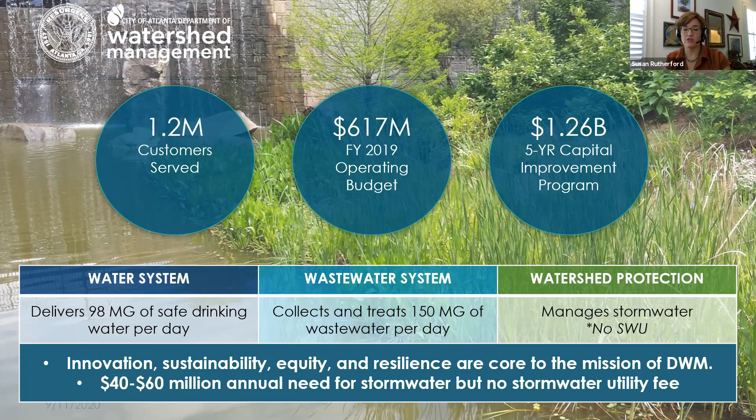Stormwater runoff is everyone's problem. It's a huge resilience issue. It all comes from all of us - we're part of the problem. Our rooftops, our driveways, our walkways and sidewalks, the streets - all of this is draining at some point into a creek or a river. These are the problems of stormwater runoff, and we're talking about both quality, what's in the water, and also quantity, the volume of the water.

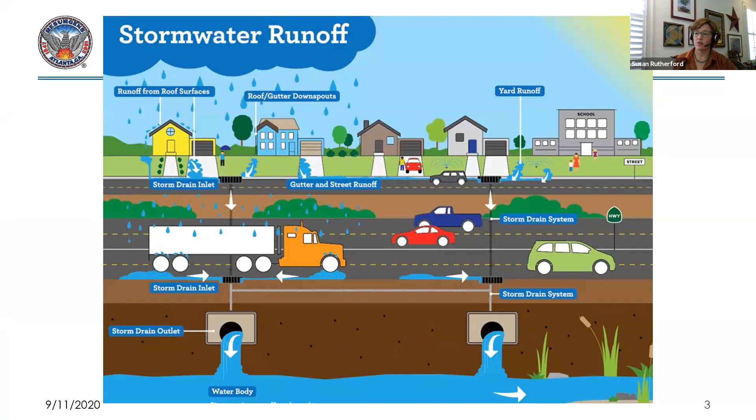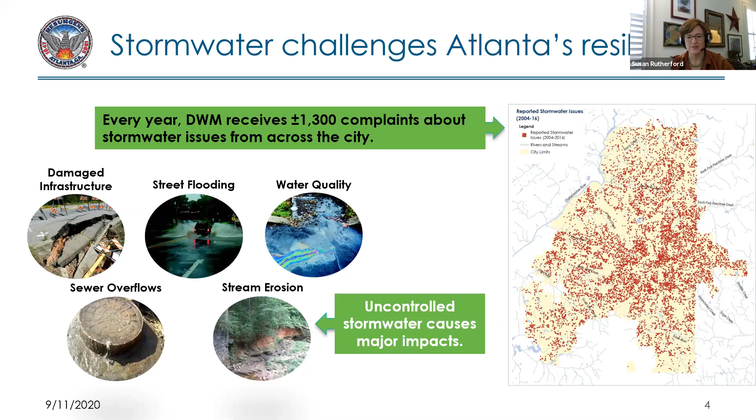I like for people to understand that even though we don't have a stormwater utility fee as a funding source, we have a lot of problems with fixing and maintaining the pipes that we have. But we do a lot with inspections and monitoring. We have stormwater compliance inspectors that go all over the city, inspecting industries to make sure they're not polluting or allowing runoff from their sites into the public storm system. We also have erosion control inspectors who evaluate active construction sites to make sure runoff isn't exiting - that everyone has their silt fence, temporary construction ponds, and all those measures so silt doesn't erode off into our streams.

And then we have floodplain management. We make sure we have very strict ordinances in the city, probably stricter than anywhere else in the state, where we don't allow any development in the floodplain. We've had these rules in place since the 1970s. And then we have our capital improvements, both on the gray and the green side, which is what we'll continue to talk about here.

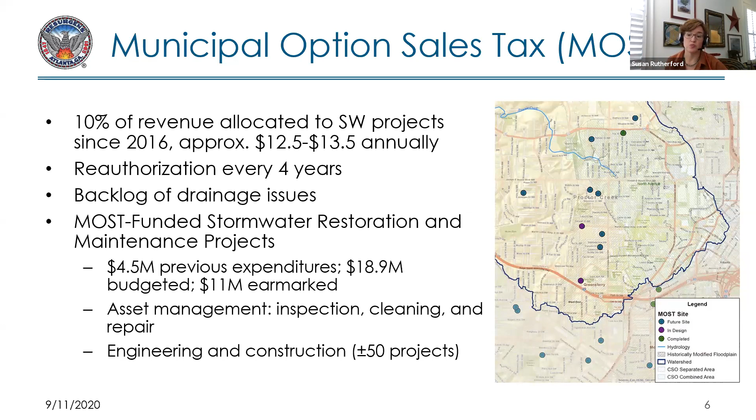Another thing this money enables us to do is more green infrastructure. We have a green infrastructure strategic action plan developed with a whole series of partners back in 2018, including American Rivers, the Conservation Fund, West Atlanta Watershed Alliance, and a lot of local organizations.

Green infrastructure is a way to manage stormwater by replicating how Mother Nature would manage it. We've covered the city with driveways and pavement, so we have to do special design for green infrastructure to infiltrate the stormwater and manage and clean it with plants and soils, special plants and special soils involved in the green infrastructure.

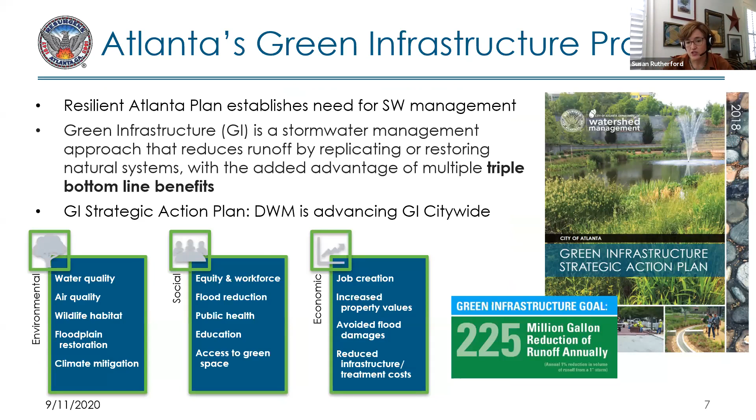Another way we manage stormwater through green infrastructure is with rainwater harvesting. These relate to our equity principles - the economic, social, and environmental benefits that climate change people are well aware of. These are examples of green infrastructure like bioswales and rain gardens. We have a constructed wetland in southeast Atlanta, built with the Army Corps of Engineers a few years ago, that's now designated as a wildlife Audubon sanctuary.

Stream bank restoration also comes into play with some of our green infrastructure projects.

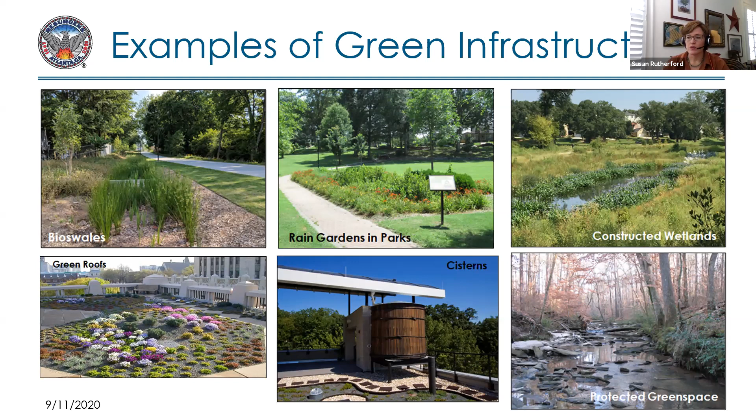As far as implementation of green infrastructure, we haven't had the stormwater utility fee, but we've been able to implement some of it in the combined sewer area. The combined sewer area is about 10% of the land area of the city, basically all around downtown, and encompassed within the Atlanta Beltline.

If you think about the geography of the city, the Atlanta Beltline sits on a ridge line around an old railroad line. It's kind of on a ridge, and that's the flat place. So the middle of Atlanta is on the hilltop in the middle of the city, and all the watersheds flow out from there. So the middle of the city was where they piped all the creeks - they piped them over and turned them into sewers.

That's a rough explanation of the combined sewer system, but it's where all the drainage, the stormwater runoff, goes into these piped creeks, which are the sewer lines. They get wastewater, and all the wastewater and stormwater in those pipes goes out and ultimately gets treated at the wastewater treatment plants before going into the river. That's the combined sewer area in the middle of the city, where you have both stormwater and sewage in these pipes.

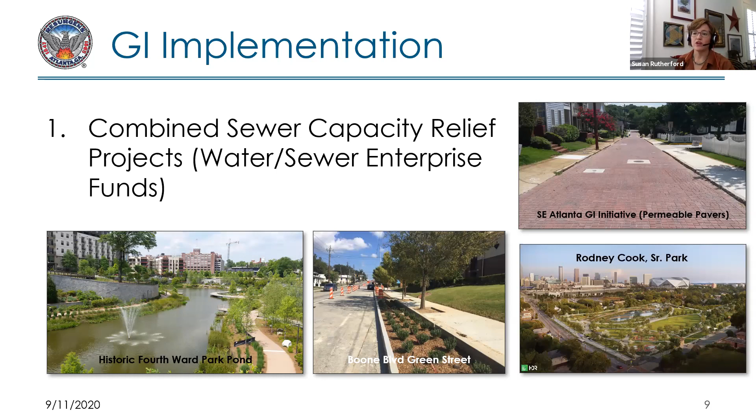Moving on to the next area, the municipal option sales tax money - I'm spending more and more of my time not on the green projects, which I love, but on the gray projects where we're trying to fix broken storm pipes and curbs and inlets in the streets, and dealing with complaints about street flooding. But we're trying more and more to integrate green infrastructure into the solutions for these problems and complaints, and those are funded by the municipal option sales tax funds.

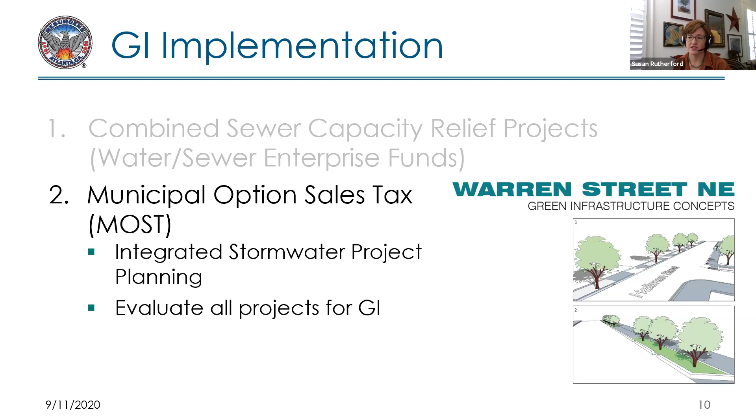The next way that we're implementing green infrastructure is the post-development stormwater ordinance. This is where most of the green infrastructure that we've been able to install is not installed by the city, it's installed by developers. That's because we have an ordinance that requires them to use green infrastructure to manage the first inch of runoff on their site, for both volume management and water quality management. So we're having green infrastructure all over the city as a result of that.

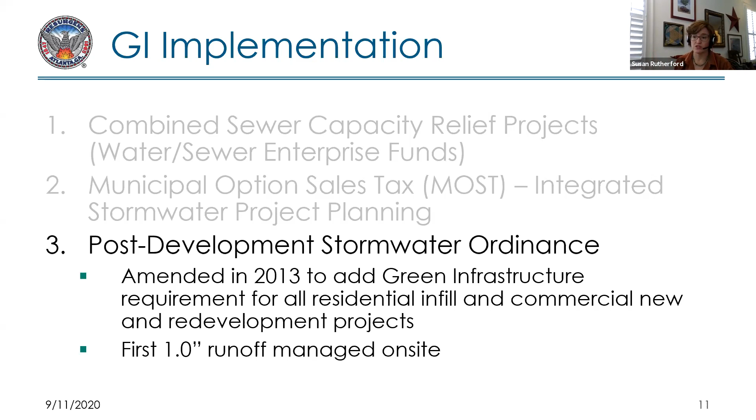So, the amount of runoff that's being managed by the private sector, by development, is way more than what we're able to pay for and manage with public projects. Those are the numbers you can see there - we've had quite a lot of volume in terms of the runoff. And we have this goal of 225 million gallons a year.

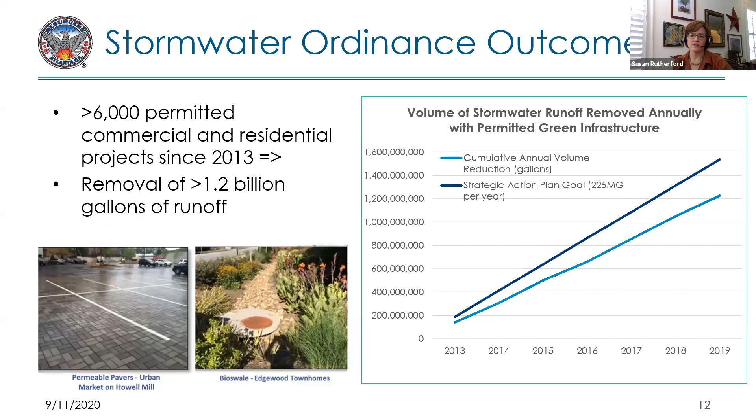I'm glad Ari talked about equity at the beginning of this, and that's a major theme with the climate talks. For us, that kind of plays out here. Development in the city of Atlanta occurs in certain areas more than others, and if we're depending on the private sector to do most of our green infrastructure development, then that's mostly going to go to the north side.

Moving on, the fourth area of funding that we have is grants and innovative financing opportunities. For grant projects, we have the EPD 319 grants, and we're doing some projects like one now with the Blue Heron Nature Preserve, which is not in an equity area, but they're a really great partner, and they had a really innovative project involving beaver dams.

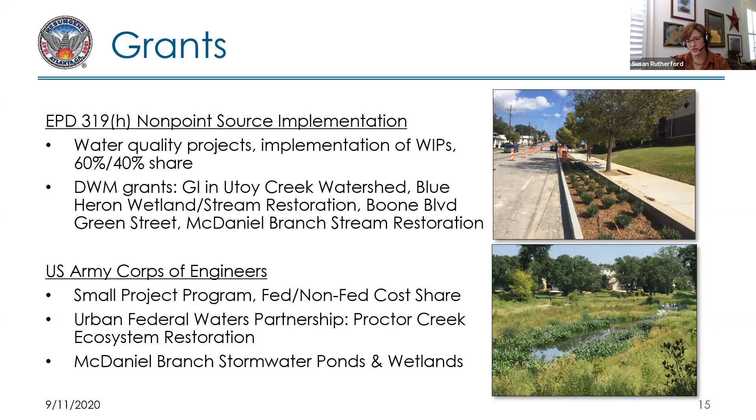With the U.S. Army Corps of Engineers, we're doing this constructed wetland, and they also did a study along Proctor Creek that's going to result in some stream restoration projects. Some of our partners, we partner with other organizations that do grants.

So the Urban Waters 5-star grant, and then we also get some FEMA funds occasionally to do some home buyouts. And then the biggest one of these right now is our environmental impact bond, and Amanda Hallauer will tell you more about that - she's the project manager.

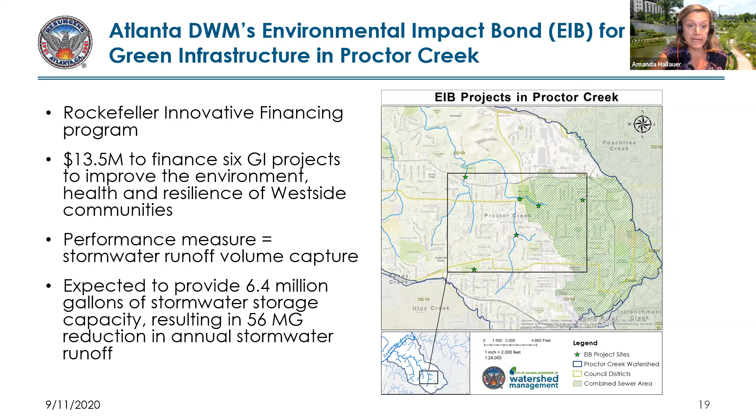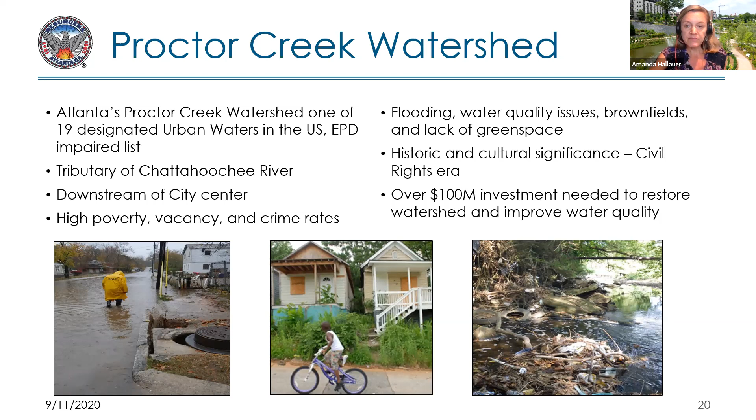The Proctor Creek watershed, as I mentioned, is a high priority area of the city for these EIB funded projects on the west side. It's the only watershed entirely within the city boundary, running from downtown to the Chattahoochee, connecting 35 neighborhoods with high historic significance - this is the birthplace of the civil rights movement, largely African-American populations. These neighborhoods in the upper Proctor Creek watershed are located just downstream of the highly built-up downtown area, so they've faced disproportionate impacts of stormwater runoff, flooding, pollution, and associated environmental, public health, and economic challenges. It's an environmental justice hotspot, as these neighborhoods also face high unemployment.

I can't get back to my last slide. And there are vacancies, brownfields, and a lack of green space. So all of these issues we're trying to address.

What slide do you see right now? Is it EIB projects and goals?

Yes, EIB projects and goals. All right, so...

The city has identified a huge need for investment in the Proctor Creek watershed, and investment in ecosystem restoration and watershed improvement projects needed to address the many challenges. The types of projects we're funding here with our EIB revenues include a variety of green infrastructure, bioretention along streetscapes and in city parks, stream and floodplain restoration, constructed wetlands, and several of the types of projects Susan mentioned.

Our primary goals are to address local flooding and water quality issues in our streams and waterways by reducing the impact of stormwater runoff, both in combined sewer systems and in our creeks, while creating many additional benefits: providing new green space and open space for neighborhoods, restoring habitat, providing environmental education and recreation, improving public health, creating jobs and workforce development opportunities, and beautifying neighborhoods.

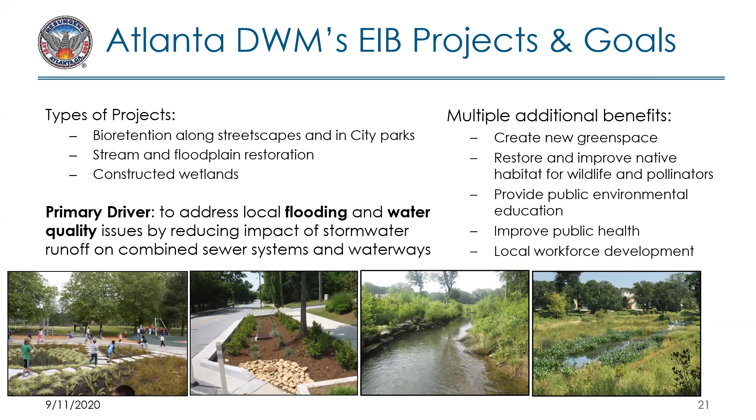Let's see, is this advancing? No, it's not. Okay, I seem to have some sort of issue—there we go. Okay, whew, there we go.

All right, so the benefits that I just talked about—as I explained earlier, the unique aspect of the EIB is that it actually factors in the economic value of all of those additional benefits into the financial model, the bond terms. So we worked with our advisors at Quantified Ventures to select several benefits that we could essentially monetize and assign values to. These values are also tied to the volume of stormwater captured, our outcome metric.

We modeled how it changes as the performance, as the outcome, changes. So we looked at flood risk reduction, water quality improvement, job creation, and then air quality improvement and heat island reduction tied to public health impacts.

These were calculated both based on actual cost savings, like avoided treatment costs, et cetera, as well as revenues that would accrue to the city through things like property taxes and decreased social services needs, et cetera. So we calculated a total $19 million benefit to the city—economic benefit or value to the city—based on the as-designed volume of these projects.

But that said, this is really a conservative number in our analysis, since there are quite a few intangible outcomes that we just couldn't monetize that will also be provided. So that is still a good return on investment nonetheless.

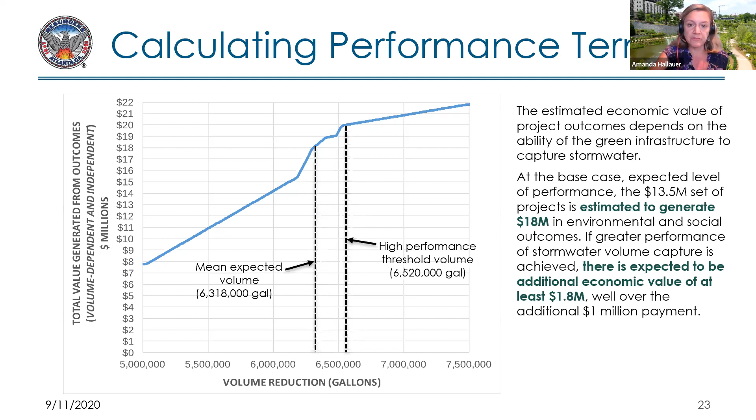That's called the performance payment. It means that the city is sharing a portion of that additional value with the investors to reward them for taking on the risk. But we're still receiving a net positive benefit, and it's basically a win-win for the issuers and the investors. That's the idea. And this is how it looks.

The way it works, you can see in this graph, is that there's a base case. So if our projects come in anywhere up to 6.52 million gallons—that's our high performance threshold—we're still paying back the bond, but at a below-market rate. We're actually getting a better rate than we would, as the investors take on a slightly lower return in exchange for about a 25% plus chance that we will exceed this high performance threshold. At that point, the city would pay out a performance payment of $1 million pro rata, to basically share a portion of those benefits.

We found several advantages to using this mechanism. It provided access to a new source of investment capital—this sector of impact investors who are interested in getting a financial return but also seeing positive environmental outcomes, so that's a new source of private money. It also gave us an opportunity to prioritize some of the impactful projects that don't always get the limited funding. And it's a shared success model—we're aligning incentives, which makes for a nice story. Additionally, we're able to test innovation and manage risks.

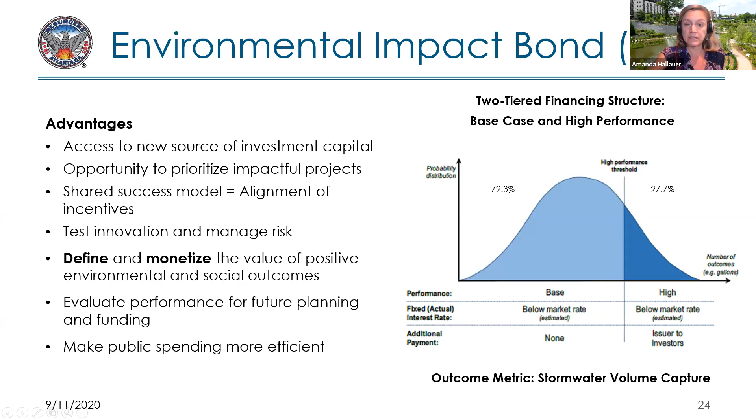Our timeline, we were awarded this opportunity and announced it in early 2018. It took us about a year to put this all together. We had to structure the bonds, which involved lots of coordination among different groups of people. The project design and engineering was tied to the financial terms.

Since we were projecting outcomes of these projects, that was really interesting. The engineering and project teams were working with our financial people and the lawyers, and we all had to coordinate. So lots of lessons learned.

At the same time, we had to go through all the city approval processes, get our council to approve the bond ordinance, et cetera. And then there was a need to market this, and Neighborly helped with that.

This being a new type of bond in the municipal bond market required some education and outreach to potential investors to explain what this was. I could have used even more time, to be quite honest. There were some interested investors who said, I like it, but I want to wait and see one succeed first. That's part of what it means to pioneer and be new. Hopefully we'll be that.

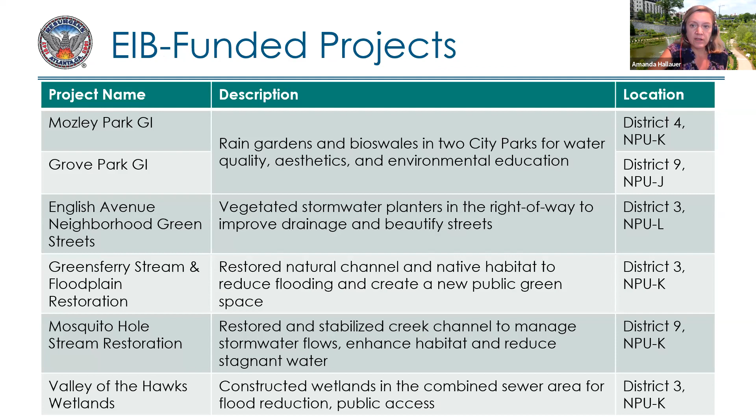If I have a little more time, I wanted to go through the fun part, the actual projects that the EIB is funding. These are our 6 projects listed in a table here. First we have 2 projects in city parks, as I mentioned. I'll go through a series of renderings and photos to illustrate.

Mozley Park is one of them, in the Mozley Park neighborhood on the west side. The idea with these park projects is to integrate bioretention, enhanced bioswales, bioretention gardens, and buffers into the park landscapes to collect stormwater drainage, reduce flooding, improve water quality, and filter the water before it gets into the creeks, as well as to aesthetically enhance the park by integrating these features into the park areas.

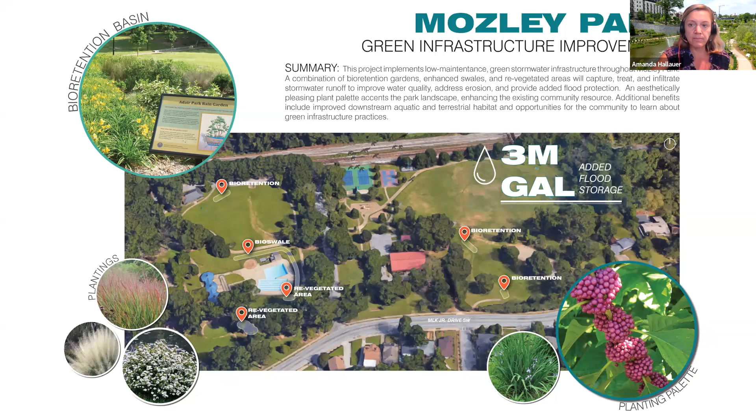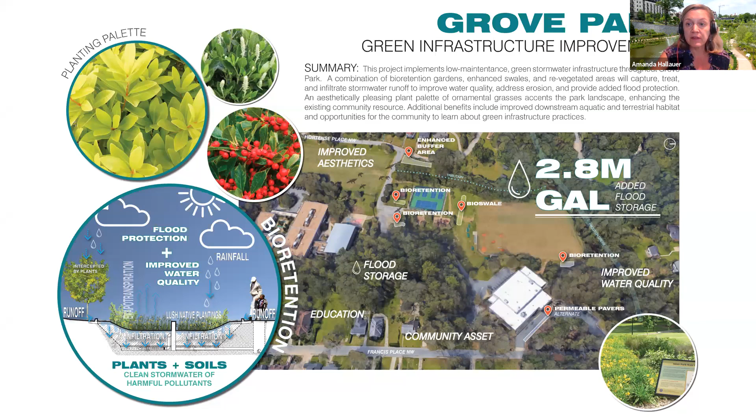You can see some of the same type of features that will be integrated into areas of the park that are underused, that aren't used for recreation. It also provides opportunity for education through signage and that sort of thing. Here's an example of a bioretention feature that we installed in Selena Butler Park to show how we can integrate these into some of those areas.

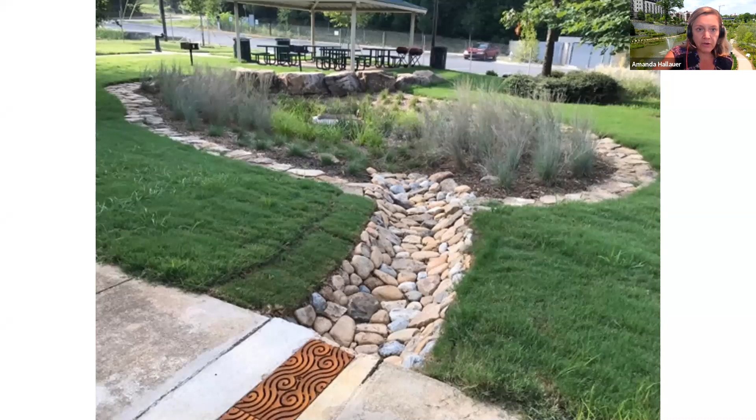So then we have the English Avenue neighborhood Green Streets project, or Green Infrastructure Street Improvements. English Avenue, just west of Mercedes-Benz Stadium, is a floodplain neighborhood with lots of localized street flooding. Here we'll be installing stormwater planter bump outs along the right-of-ways of several blocks. This collects runoff from the streets to capture it and increase or relieve capacity of the combined sewer to reduce overflows. In addition to reducing flooding, it provides streetscape beautification with vegetation, traffic calming, and those sorts of benefits.

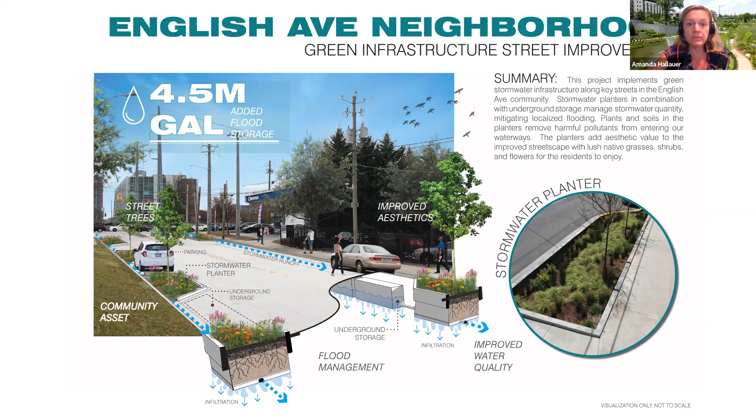So those were some of our bioretention-based BMP projects. We then have a few large ecosystem restoration type stormwater projects that we're funding. One of them we call Greensferry, named because it's just downstream of our closed Greensferry combined sewer facility. That area has actually been separated now, but it's still just downstream of where lots of stormwater from a combined area upstream is routed, so there are very, very high flows that go through this site. It's a low-lying area, and we will be restoring the stream channel there, reconnecting it with the floodplain, as well as restoring native habitat on the site.

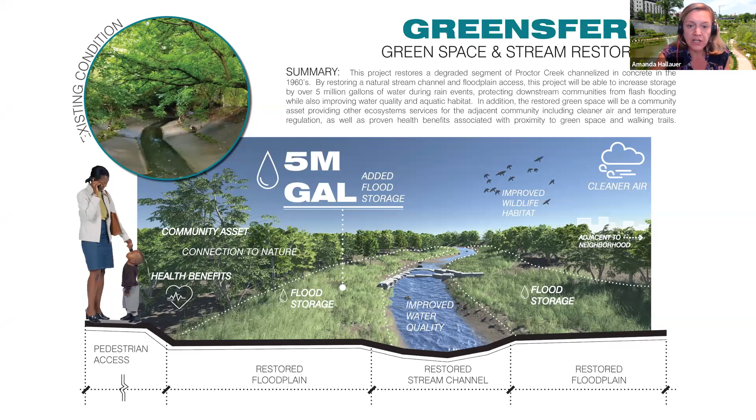So you can see existing conditions - there's actually a large concrete channel where the stream is currently channelized. The idea was to just send that water straight through, but it obviously leads to lots of flooding in large storm events and erosion. As you can see here too, there's lots of invasive species overgrowing the site.

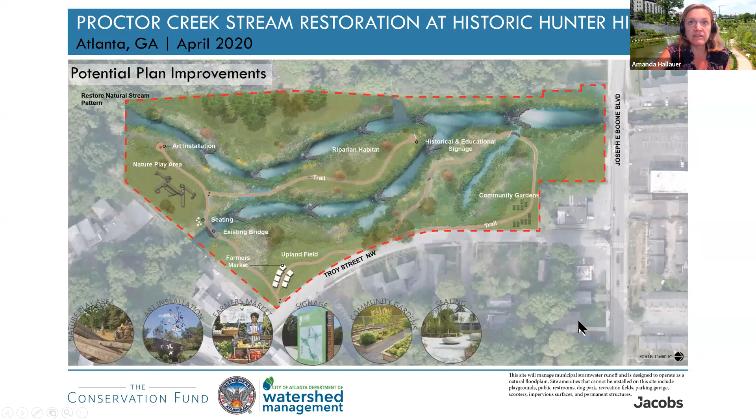So the trail network - this is going to be a public open space. It's a 9-acre site and will be the first park basically in the Hunter Hills neighborhood, which residents are excited about. It'll be sort of a natural area, nature preserve type park - not intensive use. We are working with the Conservation Fund, who helped us acquire this floodplain site, which clearly is undevelopable, to work with the community to envision amenities and ways this site could be improved - things like art and cultural installations, natural play areas, seating, maybe markets and things like that. So that's an ongoing process.

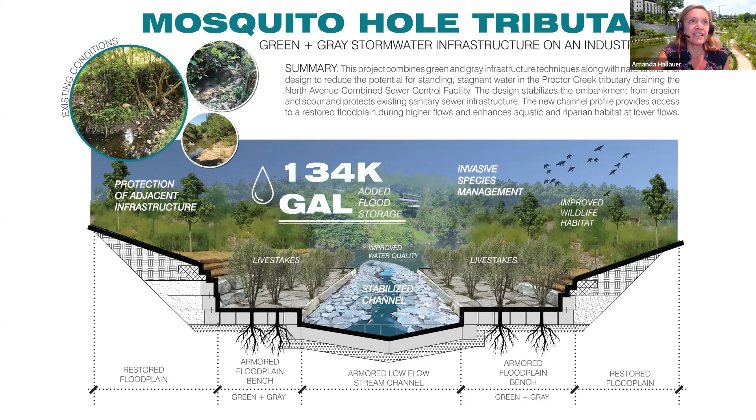We have another stream restoration project called the Mosquito Hole tributary. It's also just downstream of our North Avenue combined sewer, so it receives those types of high flows leading to erosion - it's a very degraded stretch of stream. We'll be stabilizing banks, restoring native vegetation, as well as improving a stagnant water issue that has created a public health issue, which has given it its name, Mosquito Hole. You can see that illustrated here.

And then finally, we have a project at a site we call Valley of the Hawks. It was actually named that during a community-based planning process several years back, called the Proctor North Avenue Green Infrastructure Vision, led by local environmental organizations and community leaders, to identify opportunities for green infrastructure in this upper Proctor Creek area. This was one of the projects identified, so we're finally being able to bring this to fruition through a partnership with the Conservation Fund and others. The site is a low-lying area.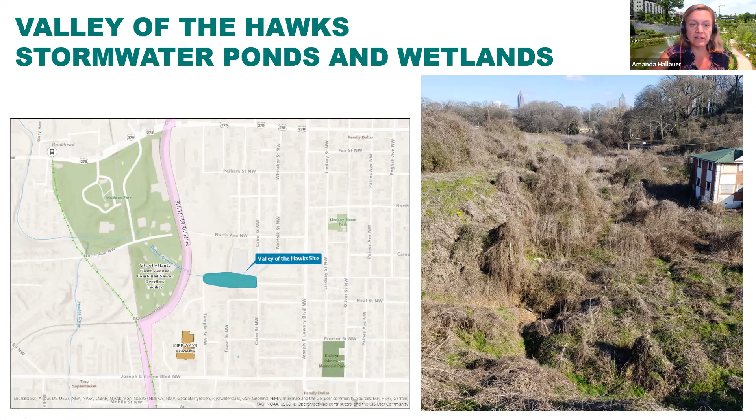So we're creating this series of stormwater ponds and constructed wetlands that will collect stormwater runoff from the surrounding neighborhood and relieve capacity. Let me go to the next slide, which shows a plan view rendering of these pond wetlands. It will relieve capacity of the combined sewer area by diverting a lot of runoff into the wetlands, which will be filtered, stored, cleaned, and then released into the Mosquito Hole tributary, instead of into the big trunk line with the combined sewer. That will reduce those sewer overflows and the localized flooding.

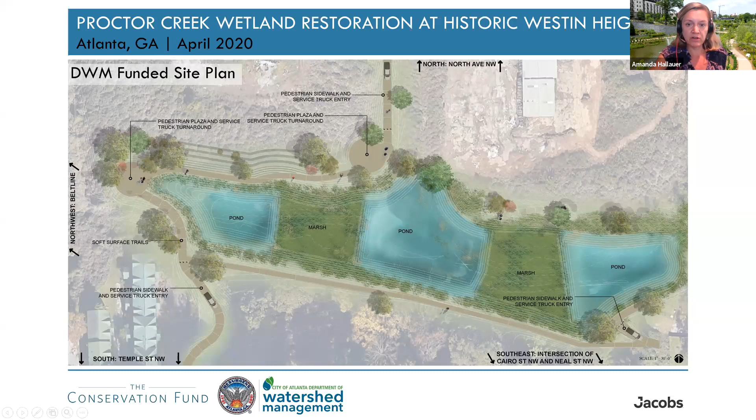This is also going to create a new natural area in the historic Westin Heights Bankhead neighborhood. We'll have a walking path around it, and eventual Beltline access. We're going to be working with our partners and a neighborhood association to come up with a vision of how this could be improved for community use. This isn't part of the DWM funded project, but will be a partnership moving forward to do things like create boardwalks, outdoor classrooms, signage, and other amenities for the neighborhood.

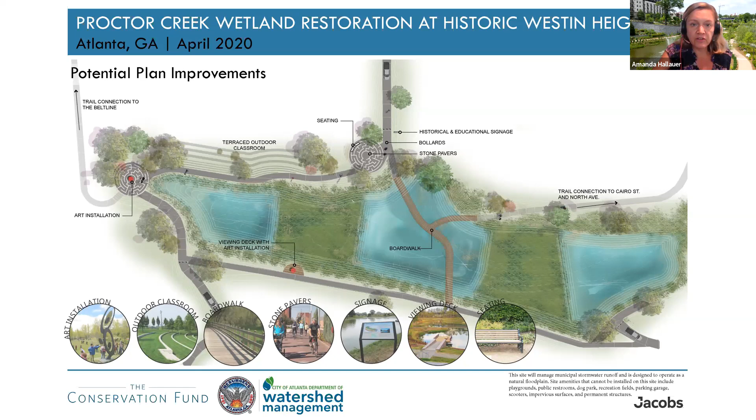All right, so I hope I didn't go too long with that, but if we have any questions, we're happy to answer.